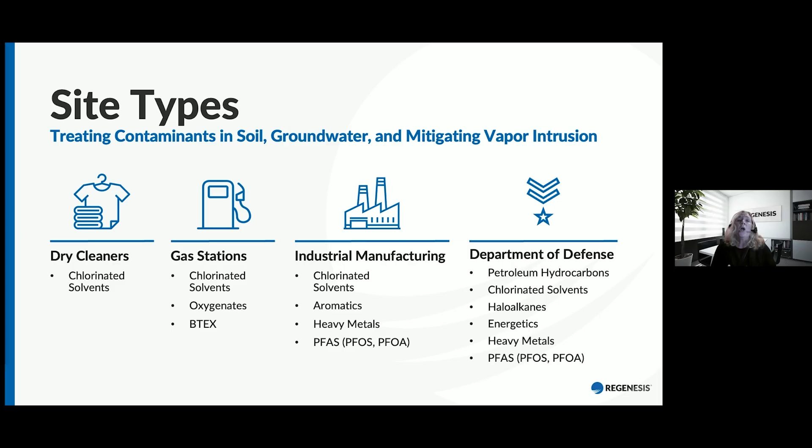So when talking about PFAS, what is the process that we use? There's been a lot of discussion about activated carbon, and we're using an activated carbon product, but this is one that's injected into the subsurface. What Regenesis does is buy activated carbon from a supplier, and then take that material and grind it down to 1 to 2 microns. Our manufacturing is all in Tennessee, so we will do all the grinding, and then we create this colloid. This puts the carbon in a formulation that allows us to inject it under low pressure, so it can very easily be applied into the subsurface, where the objective is really creating a subsurface filter.

Now, many of the talks that have preceded this have been talking about water that's above ground, or ex situ, that's been pumped out of the ground, where you're separating the PFAS out of this media. We're taking a different approach where our work is all happening underground.

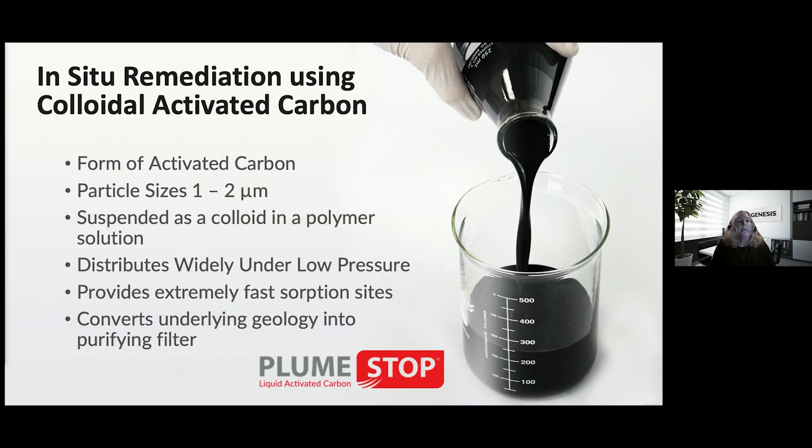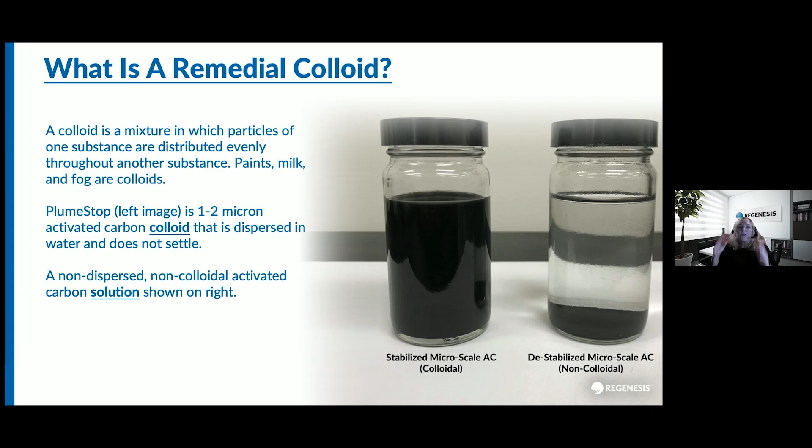So some of the questions we talk about are the efficacy of carbon and some of the kinetics associated with it. Well, when you're talking about PFAS, activated carbon is a very well established and universally used material to sorb many of the PFAS compounds. Now, each of these compounds is going to have different sorption characteristics depending upon whether they're shorter or longer chained PFAS compounds. What we're looking at are the regulated compounds, and so that's our focus—if we're cleaning up groundwater, it's to attack the compounds that are currently regulated or considered to be regulated. So you look at some of the differences in questions.

What about breakthrough and kinetics? There had been some discussions about slower kinetics. Because we create these smaller particles, these 1 to 2 micron particles, the kinetics of sorption increase rapidly. So you have a very fast removal of your contaminants from the aqueous phase and sorbing onto the carbon. While you may have the same capacity of the granular activated carbon in its absolute mass and what it can sorb, the sorption kinetics are much quicker with these smaller particles.

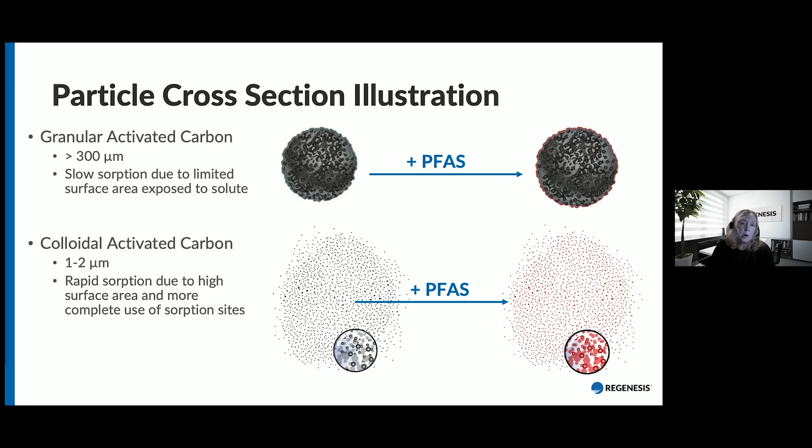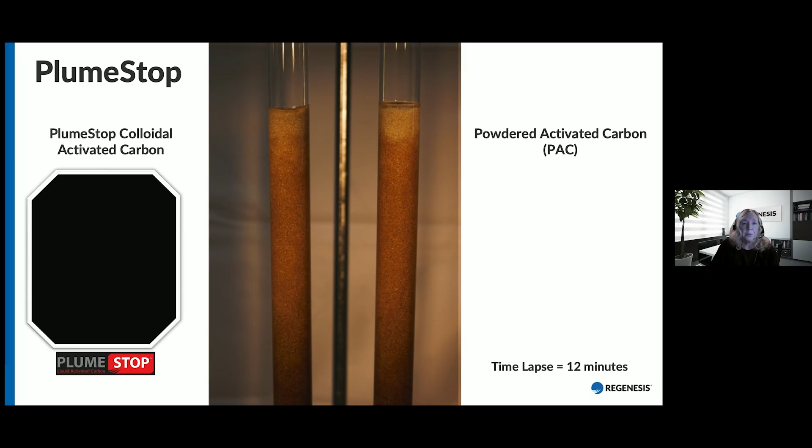REGENESIS has a number of patents, and we believe that we have a really good position as far as the in situ application of colloidal carbon in the subsurface to address a wide range of contaminants, not just PFAS, but other contaminants like chlorinated solvents and petroleum hydrocarbons as other examples.

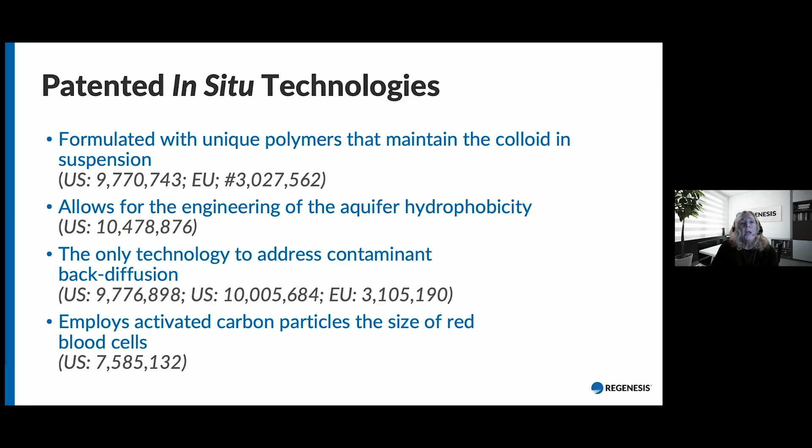The challenges with PFAS chemicals is that they're resistant to degradation. And I see, if Dr. Gwynn is still in the audience, we say 'forever chemicals,' and I will be sure to remove this for future presentations. I am certainly hopeful that degradation is something we're able to work with actively, but at this moment in time, we don't have systems that are reliable or ready to go as far as a degradation component for an absolute remediation.

PFAS are found to be quite ubiquitous, and they can be a little complicated in some of the fate and transport, and they have very low cleanup criteria. This adds to some of the challenges in remediation. I'd also say Dr. Gwynn had a nice conceptual site model and described that, which was helpful for me.

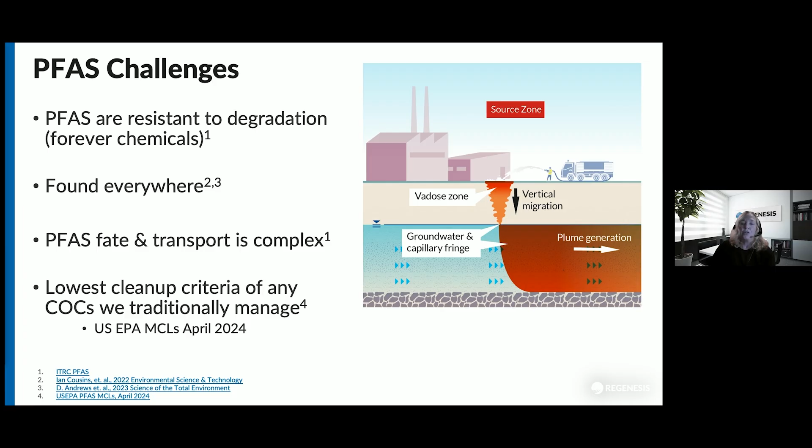So again, we're dealing with the groundwater and the subsurface, and a methodology to address these PFAS constituents. Where are we looking at the PFAS, and where are we trying to address it? In one sense, we have the source area. Are you looking at a location where there was fire training? Is this at a Department of Defense facility, maybe an industrial property, or was there some sort of discharge at an industrial property?

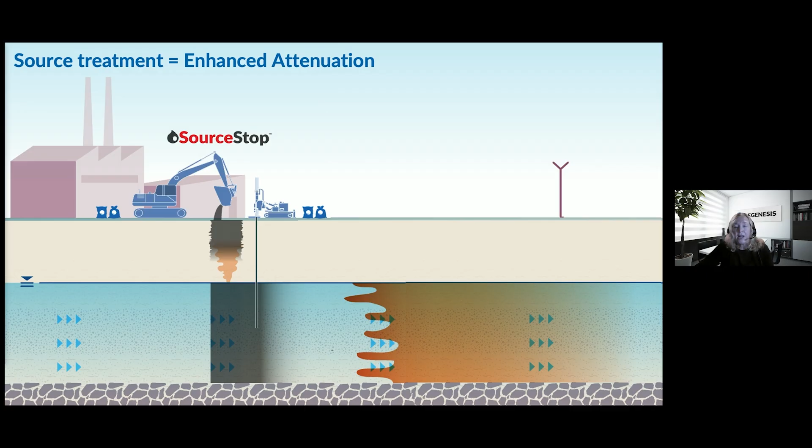Over time, through infiltration and rain, these PFAS compounds will move through the unsaturated soil. This is just the dirt until we get to the saturated zone where groundwater is, and then once here, it'll start to distribute. The different areas you can address this are either in the source area, in the soil above the water table, or even these zones below the water table. PFAS are also very well known to really stay in this water-soil interface. And then there's the plume that develops over time.

The other place we can address this is to perhaps create a barrier that keeps the PFAS from moving off site. As mentioned by some of the previous speakers, if you're looking at sources that may be contributing to water found later in drinking water sources or at waste facilities, this is where you're in these upstream areas trying to address some of these potential sources.

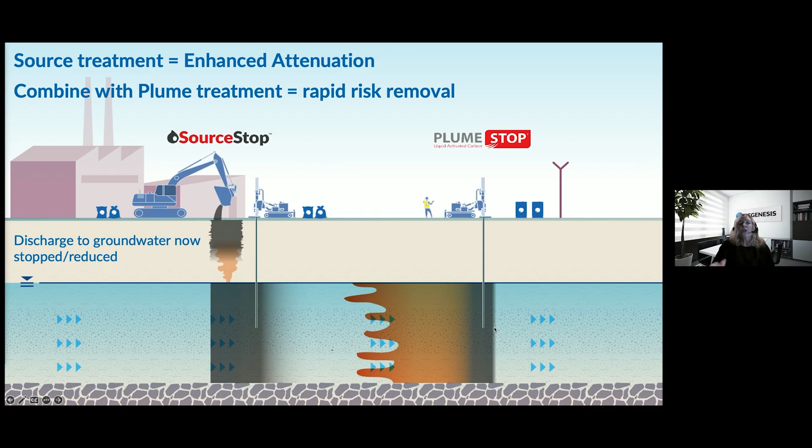The process itself is very easy. You don't even have to have wells; we'll inject this material directly through direct push or different drilling techniques. So we're going to create this filter underground. As the contaminated water moves through this filter, the PFAS is removed and sorbed onto the carbon, which is now really part of the soil matrix. There's no infrastructure left behind, and no operation and maintenance. This barrier can be established and can last for decades and decades.

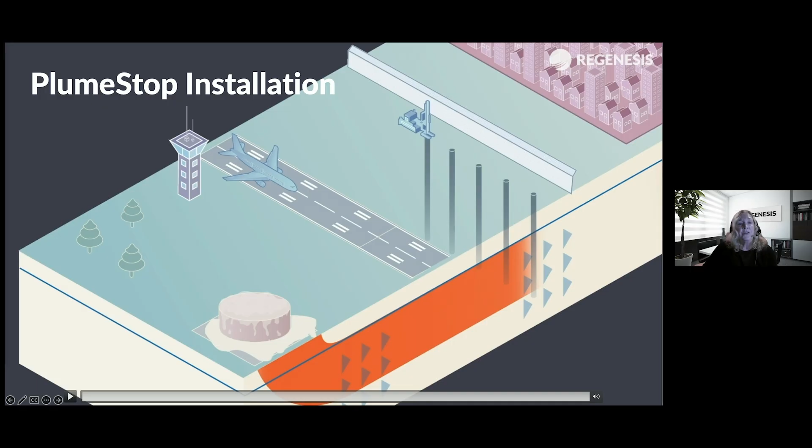So what are some of the results we've seen? In this figure, we see the up-gradient levels, and this was at a base in Michigan. Our results were at non-detect; we're looking at some of the reporting limits, but we're able to achieve standards of less than 4 parts per trillion. This is over an extended period of time, at 4.5 years. And we've had other sites that date back as long as 6.5, and I think almost 7 years now.

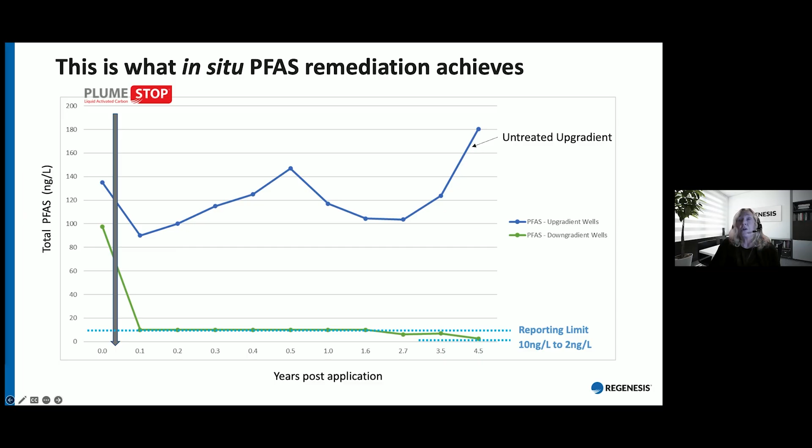But the PFAS remediation really is just in the beginning phases. There's been some estimates that there might be 50,000 contaminated sites in the US, but perhaps maybe there's 100-ish that may have started some sort of activity. This is based on some of the research we've done.

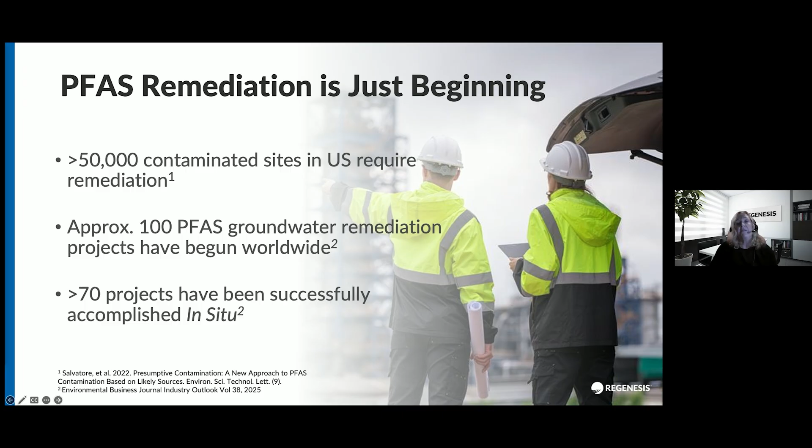As far as where REGENESIS is in this market, we've had over 70 applications in situ to date. Some of them have been pilot, but many of these are now moving into full-scale applications. So where we are now is we had 70 applications to date with 275 that are in design and in the review phase.

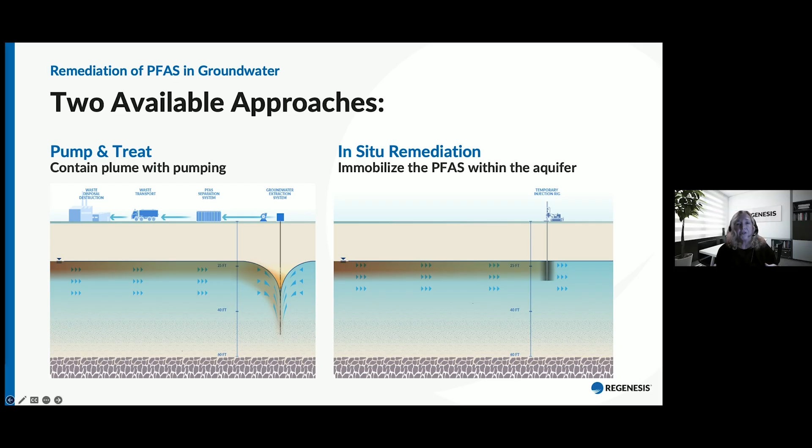So when you're looking at what technologies are actually available right now for groundwater, and I'm talking about like a groundwater barrier, there's really only 2 ways that we can address this contamination. There's been discussion already today about groundwater extraction and the pump and treat. But just for a minute, what's happening here is you're drawing the water from the ground, and then once you get it from the ground, you need to process it. You need to separate out the PFAS constituents, and then that needs to be managed. So the groundwater extraction systems or pump and treat systems are really, in essence, engineered controls.

So you're only having a fraction of the water taken out over time. And so the time it will take to actually clean up this plume or aquifer in this particular area could be 100 years. We've had groundwater extraction systems in place since the 80s dealing with chlorinated solvents. And these PFAS chemicals, given the very low cleanup standard and some of the sorptive characteristics to it, it may even take even longer.

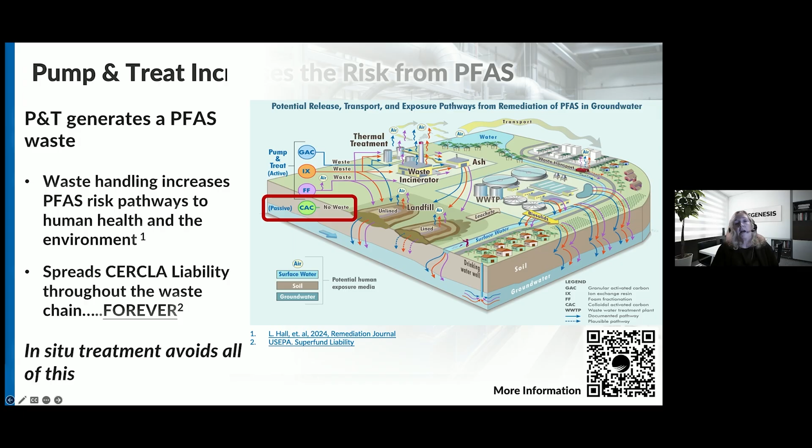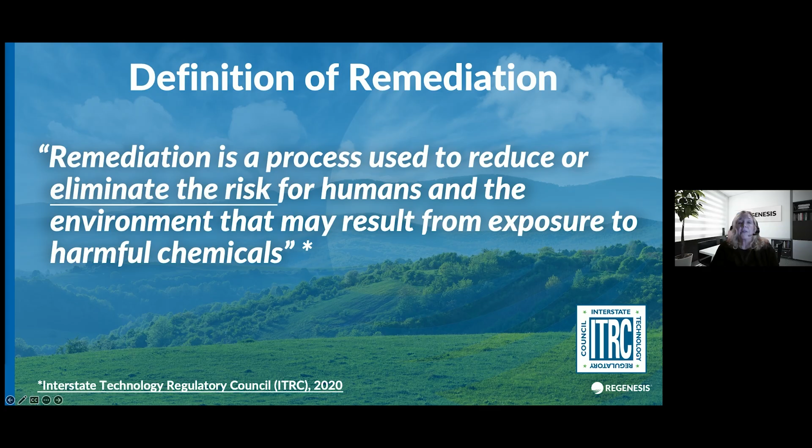If you start looking to an in situ system, there's the option to avoid much of this. So referring back to what remediation is, a process where we're looking to reduce and eliminate risk to both humans and environment that are associated with some harmful chemicals. And so the way you eliminate risk is just to avoid, eliminate the exposure. That's really the approach that we're taking here, is you eliminate that exposure.

So I want to refer, going to get into in situ, but I wanted to refer to a paper that was just recently published, and I think it's really important. It was just in the last few months, and it talks about PFAS monitored retention. For those that work in environmental remediation, we're familiar with something that's called monitored natural attenuation. What that is, is the reduction in the concentration and toxicity of a contaminant, but that happens due to just natural processes. Now, when we're talking about petroleum hydrocarbons, chlorinated solvents, there are a number of processes that can be used, and one of the big ones is degradation.

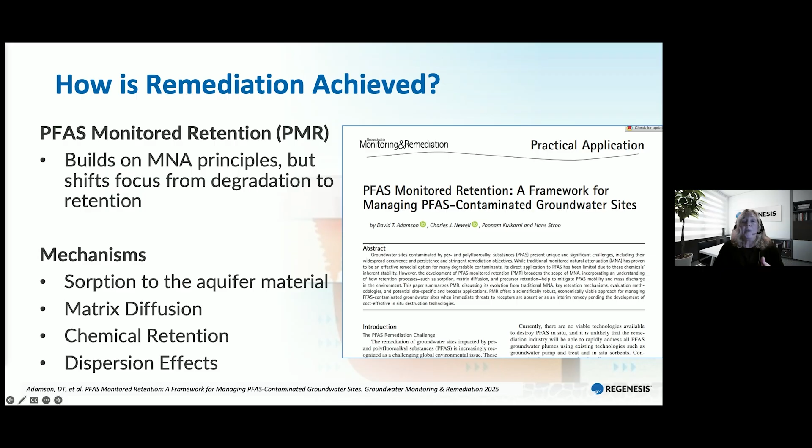But in switching focus here and looking at these principles and how they can be applied to PFAS chemicals, we're looking more at sorption, matrix diffusion, chemical retention, or dispersion. So we're looking at what happens to PFAS once it enters the groundwater. What is the fate of that compound over time? What does it look like at your property boundary? What does it look like at a critical exposure pathway where drinking water wells are? And so there's going to be, I believe, an increased interest in this, and companies like the consultants are going to be evaluating this in their investigations. And I think what's important about this paper is it lays out some tools and guidance on how to do this.

I know the publishers of this paper were funded by the Department of Defense. I'm not saying this is from the Department of Defense, it's just an independent paper, but it gives some guidance on how to do this. There may be some sites where natural processes alone will be fine. There may be some where you can add an enhancement that creates the stability you need. Or maybe your receptor is so close you need a groundwater extraction system. So I think we're getting more sophisticated in how we're looking at this problem and how we can address this challenge.

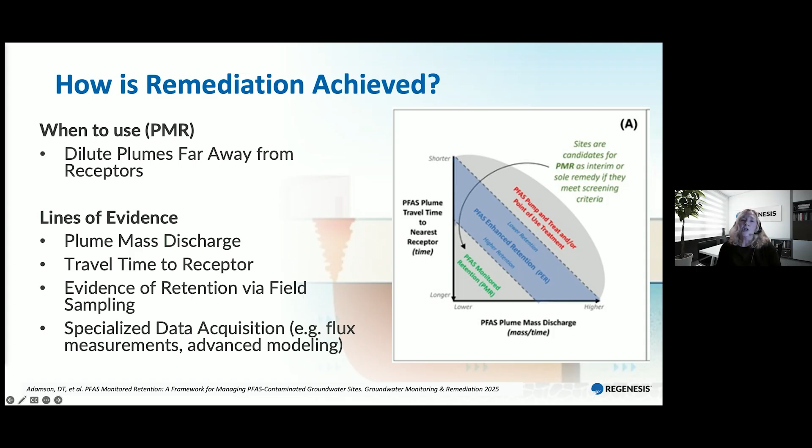So where we fit into this, REGENESIS, is through the addition of something like a colloidally activated carbon or PlumeStop that changes the subsurface and increases retention. By following the guidance to look at where my contaminant is going, whether it's stable, whether I'm okay at the property boundary, I'm able to mitigate this source so it's not moving off site.

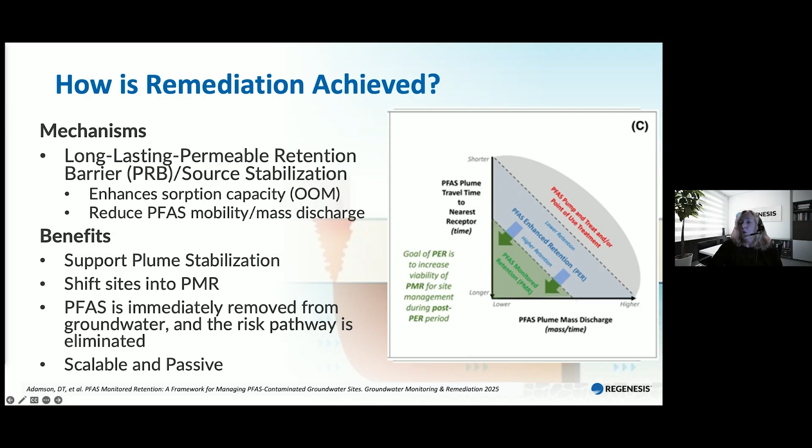For whatever the particular situation is, this is a process that is currently available and is currently being used. So again, where can we focus this? We can look at the source, and we can also look at the plume.

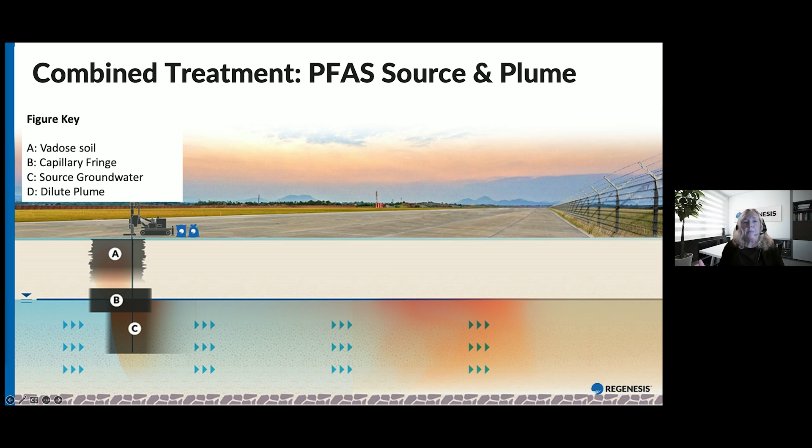Looking at the plume approach, if I'm creating a property boundary sort of treatment scenario, the cost associated with in situ treatment is typically going to be a third of the cost of a groundwater extraction system. For example, at an airport facility in the UK, we applied the in situ colloidal activated carbon for 1.4 million. The estimated cost for a groundwater extraction system was going to be in the 4 million range.

For a fire training facility in the Midwest, this site was actually identified because it was an upgradient source. This was a responsible party that they thought was contributing to drinking water that was having to be processed. So they went forward with this application, and that was in the range of 3.5 million, while the pump and treat system would have been closer to 20 million.

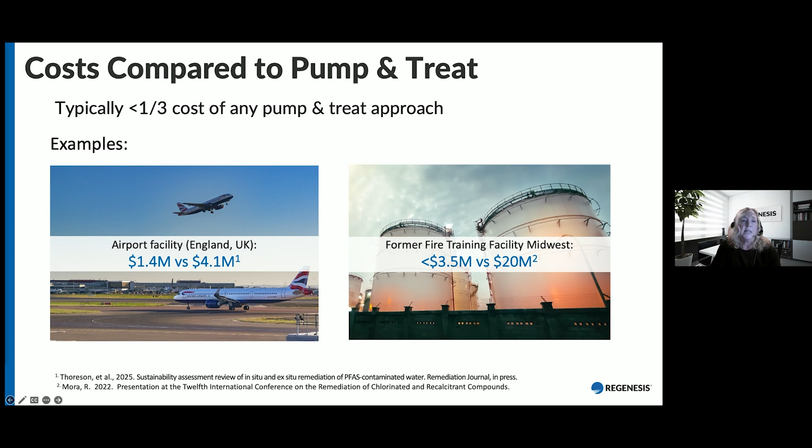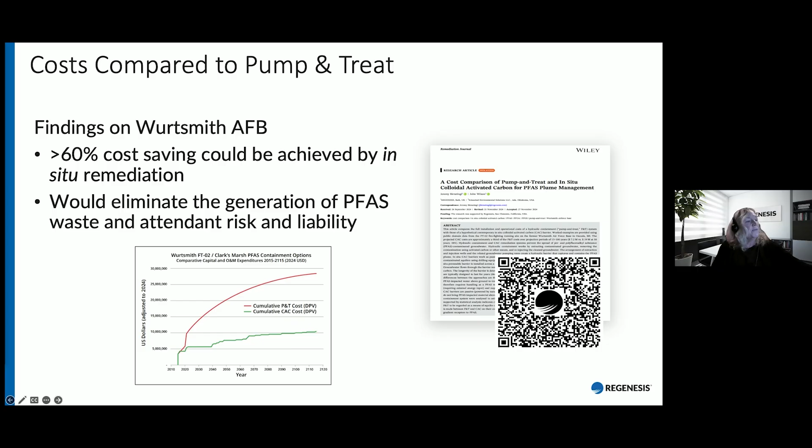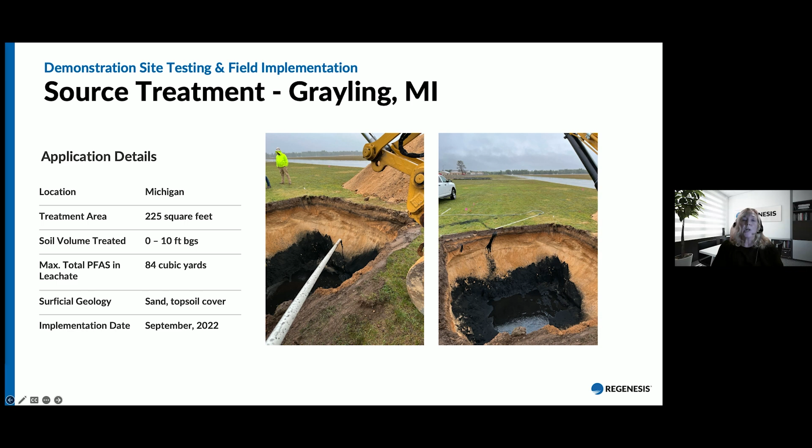Just very briefly, we also can use this colloidal activated carbon, or another formulation we have is SourceStop, for source treatment as well. It can be mixed in with an excavator. We have a liquid component that can be used to address these higher concentrations. So you can look at an approach where you're addressing both source on a site as well as at a property boundary.

And again, talking about kinetics, when we're using these colloidal activated carbon or SourceStop products, when a sample was taken from the mixed soil immediately post-treatment, we were able to show 99% plus reduction in leaching. So it's something that works immediately.

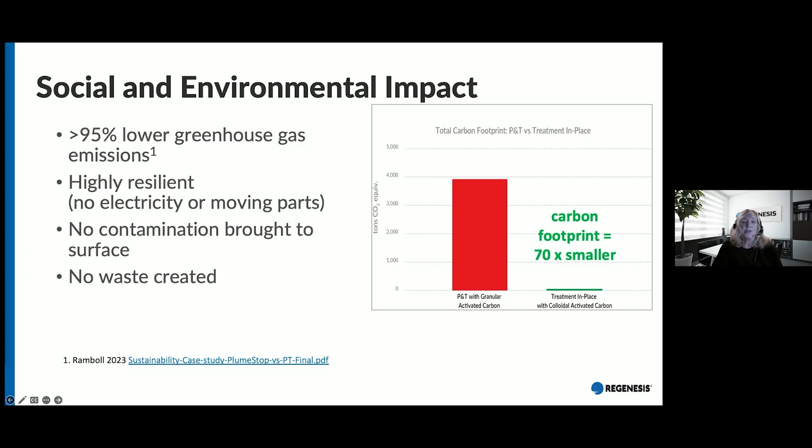There's also, as far as sustainability -- I know that's not as popular a term these days -- but it fits into having lower greenhouse gas emissions, a significant reduction in that with the in situ technologies.

So really just coming to closure, just to talk about this being a solution that is available. It is being used. It's a proven technology. I think as responsible parties are looking at options, not having O&M and having lower costs are certainly positive. And so it's also a platform -- if other technologies come along, such as microbial degradation, it could certainly be combined. But if people are looking to address things now and are concerned about their own liability, this is an option.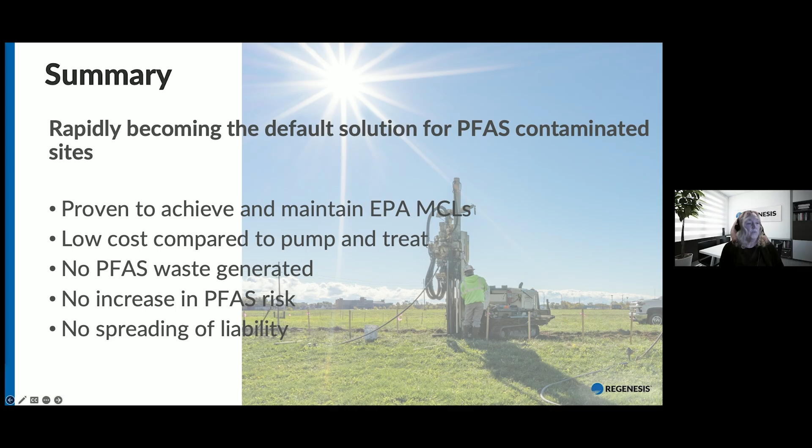And just the drivers -- we're moving forward. It's funding and regulatory pressure. Is there money available to do this work? And is there regulatory pressure to get it done?

As far as what we've seen in the marketplace, we're certainly growing. It's not growing maybe as fast as we had anticipated, and I think Rosa had mentioned this earlier, that some projects had been pushed a little, but I think what we're seeing is we've definitely had growth from last year to this year. We have some considerable projects that go into next year and even into 2027.

We've put a lot of focus on the Department of Defense. They have budget allocated for this, but that's a process that just takes a while. But if there are sites with more critical environmental needs to deal with these exposures, they tend to move a little quicker. Some of the commercial side had slowed down, but I think we're seeing that pick up again, as some of the regulations are getting settled, at least with PFOS and PFOA.

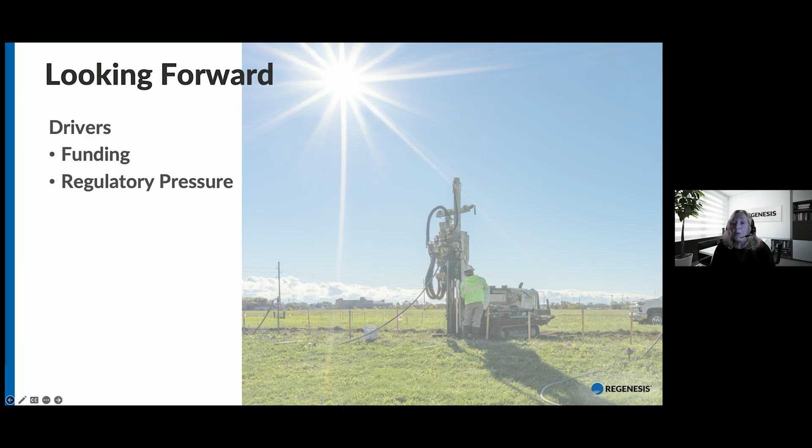Can you elaborate a little bit more on the performance longevity of a single PlumeStop application? Sure, sure. And that's a big question that comes up because there's a lot of discussion about destruction, because there's no destruction. How long is this going to last? Am I going to have to take this out of there? Well, where we're working, number one, is typically in the subsurface and groundwater. So groundwater flow is a little slower.

But the first things we do before we even get started in a project is we need to understand, you know, what levels we're dealing with, and if we have a barrier, what's the flux coming at it? So what's the mass we need to deal with? And based on that, we can design this such that we can have enough capture. And some third-party evaluations have seen this going into decades. It could be 30, 40, 50, 60 years. I mean, our typical design is going to be in the 15 to 20-year range.

Now, if you're in a situation where you have a continuing source, you may have to have some supplemental applications, but this isn't a situation where we remove it. It stays in place. If you are able to have a design where you address both the source, say for instance, if it's a fire training area, and you may have something at the property boundary, then it's really an ideal situation, because while you're keeping this PFAS from going off site, you're also cutting off the head of the snake. So at some point you're going to have less material going into the barrier, and then that can be sustained. So most of our designs are really intended to be one and dones, but there may be some where, maybe 10, 20 years down, you may have to have a supplemental application.